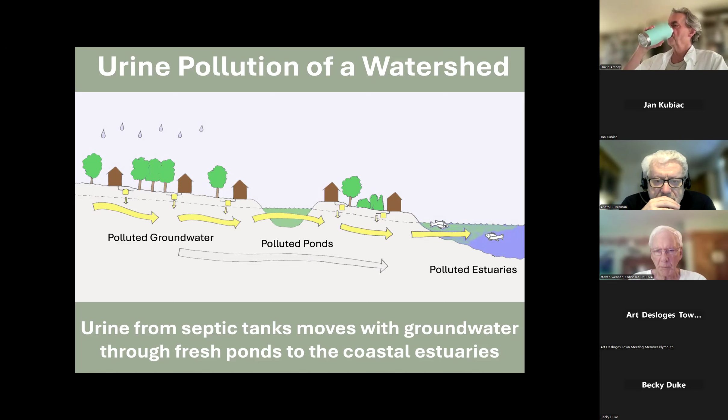So what happens here is if you're in a freshwater pond that gets polluted with nitrogen, you get cyanobacteria growing. And phosphorus too. Nitrogen and phosphorus both cause cyanobacteria to grow. Once the pollution gets to the coastal estuaries, it can kill fish by making algae grow too fast and decomposing and taking the oxygen out of the water, and the fish run out of oxygen.

And eventually these nutrients get into the actual ocean, and they cause pollution in the ocean. All the food from all the people on the Cape goes into the groundwater. The nutrients from all those people end up in the ocean. And it causes things like red tide, which is another version of cyanobacteria.

Now, the normal solution that people and towns turn to is they decide we're going to build sewers and collect the waste from the houses and treat it and try to get rid of the nitrogen out of the wastewater. And then they put all the water back in the ground again.

So a sewer only does one thing. It takes some of the nitrogen out of the wastewater that goes to the sewer. It turns it into gas, nitrogen gas, puts it into the air, and then all the rest of the water, which contains some of the nitrogen, all the phosphorus, all of the other minerals, all the pollutants, all of these contaminants that went into the water, go back into the ground again. So it basically only deals with nitrogen, and it wastes everything else. It does not recover any nutrients or recycle any nutrients.

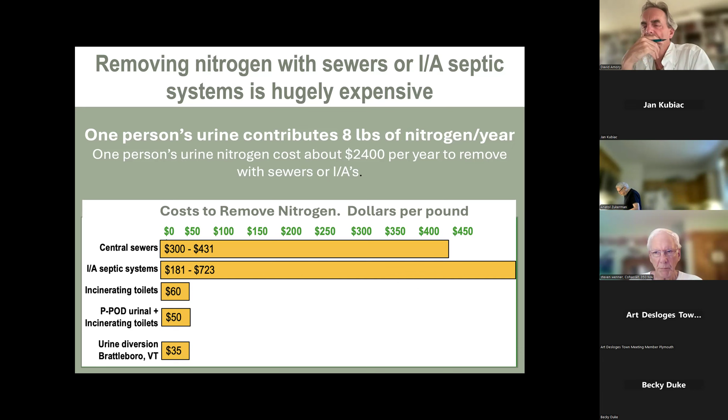There are other ways you can do this. We're going to talk about urine diversion, where you take the urine, which contains all the nitrogen, and you collect it and make it safe to use, and you send it off to a farmer who uses it as fertilizer. And doing it that way costs only a tenth as much as a centralized sewer or a special septic system. So it's a much cheaper solution to deal with the nitrogen. At the same time, what's not included in that is the savings on water if you do waterless urine-diverting toilets. And it doesn't have any of the climate issues that sewers have. We'll get into that later.

So right now we can go over the amount of water that we can save. If you have a waterless urinal, just the urine is about 4,000 gallons per person per year. For feces, it's about 2,000. Altogether, it's 6,000 gallons of water that we use as a way to transport our waste away from our house into a pipe that leads to another place. So water is only used as transport. There's no other function.

And the 12,000 gallons of water is now polluted with about 135 gallons of human waste per person per year. So the amount of water that we waste and pollute is huge compared to the amount of waste that we actually have to deal with.

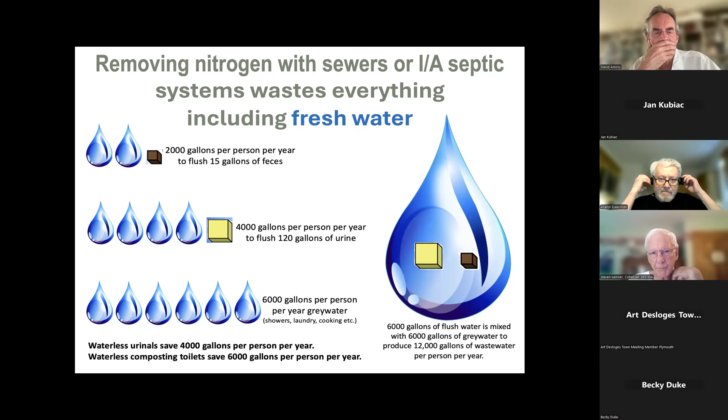So, in terms of greenhouse gas emissions, the way our society produces food and deals with our wastewater is extremely bad. It starts with making fertilizer for agriculture in a big factory, and it's made with natural gas. Very high amounts of fossil fuels go into making the fertilizer. And then machinery and fertilizer are used to produce food. And then energy is used to transport the food to the person who eats it, often thousands of miles.

The person eats the food and puts the waste nutrients from the food they ate into the ground, either in a septic tank or to the sewer. If it goes to a sewer, the sewer produces carbon dioxide, methane and nitrous oxide in the way it operates.

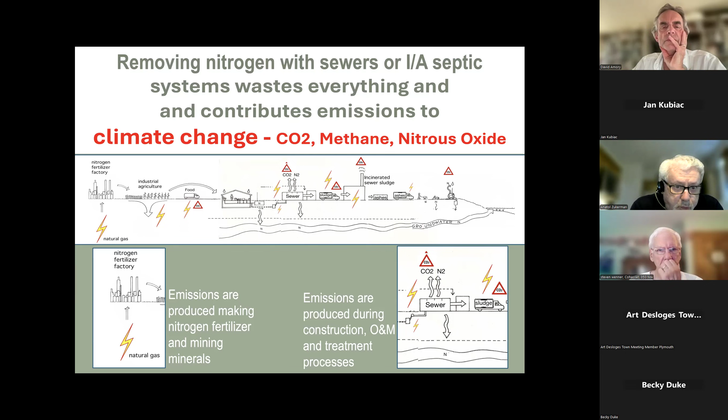And over the whole world, sewer systems produce about 7% of all the global greenhouse gases, a very high amount. And then the nutrients, some of them are trucked away and put in an incinerator and burned up, and they produce emissions there. And so all the way through the whole process, greenhouse gas emissions are being produced. And if you have urine diversion and recycling of the human waste nutrients, you can eliminate all of those emissions.

The weird part of this system is that we spend all the time and all those emissions on getting rid of nitrogen, which is essential for food production, that we absolutely need to then replace again with using more natural gas to make more fertilizer. So it's like a loss on every single part of the food production. So spending all that money on getting rid of nitrogen is absolutely ridiculous because you have to make it again.

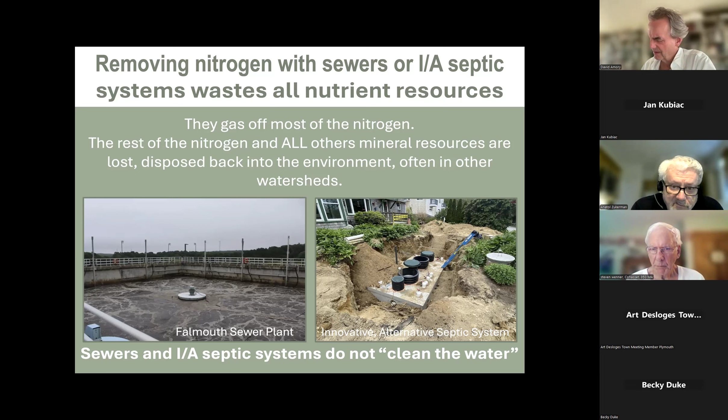To build a sewer for a single residence costs a town about $110,000 now per house. To put in an IA septic system, the homeowner has to pay for that, and the homeowner has to pay up to $50,000 to $80,000 to put this thing in. And so both of these are very bad solutions, extremely expensive. They produce emissions, all of them, and there are better ways.

So yeah, the IA systems, they always say they cost, on average right now, which we heard yesterday at the conference, $48,000. But what's not included is all the landscaping. So if you have trees or decks or whatever it is in the place where they have to put this, that is your extra cost. And to fix it later and put your landscape back again, that's another cost. Those costs are not included in any cost that you have seen mentioned anywhere.

And the maintenance, they never mention the maintenance, which can be very high. The last person we talked to, for her it was an extra $80 a month on electricity. There goes the climate. And then they had to have an engineer come. In some cases, it's monthly. Eventually, it's 4 times a year. Then it goes to 2 times a year. Then eventually, maybe once a year. And that might cost up to $400 per visit.

So what the towns typically do is they try to put sewers down at the estuary, but that's not where the problem starts. The problem starts on every house in the watershed, and by the time it gets to the estuaries, they put the sewer down there, and it doesn't fix the freshwater ponds, and it doesn't do any good for anybody upstream of the estuary.

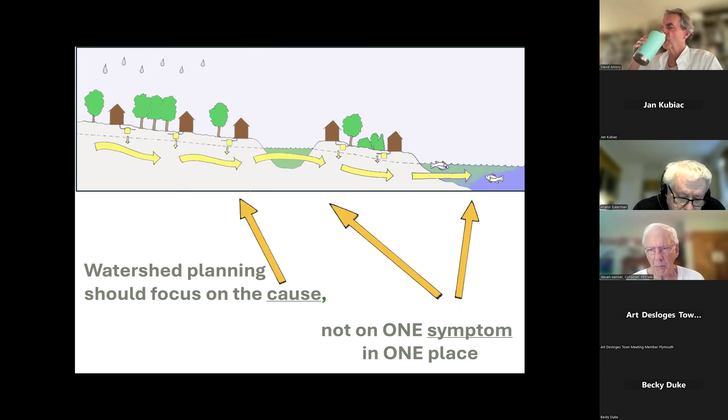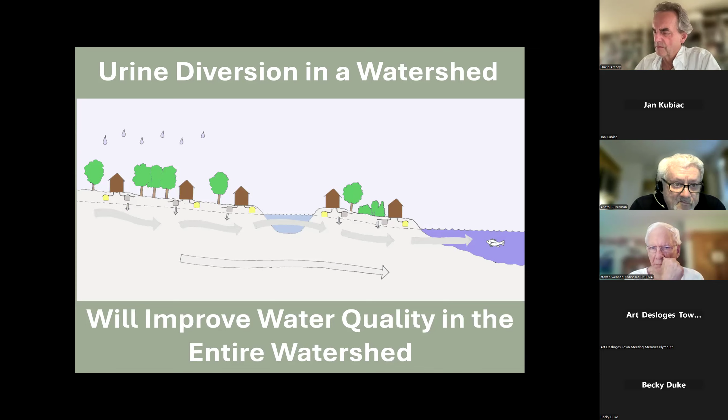So we propose that people divert the urine from their houses with special urine diverting fixtures and make it safe to use and transport it off to agriculture. If you do that, your groundwater becomes much cleaner. Instead of putting the urine down into the groundwater, you take it away above the ground, and the groundwater becomes cleaner and it goes through the freshwater ponds and does not pollute them with nitrogen and does not pollute the estuaries. Yeah, so it's a really good way to fix all the problems instead of doing only the dense areas close to the water.

And the only reason they do that is it's the only way that you can afford a sewer. And so they fix that, and then they have a quicker result because people live closer to the problem. So they hope they can see an improvement on the estuaries quicker, because everything else takes about a foot per day to move. So that's the reason why they do it. But it doesn't do anything for upstream, for any of the rivers, bogs, whatever is upstream. They're not going to get fixed at all. So we try to do the opposite and fix all the waters, and that way the estuaries get fixed.

So there are several different categories of special bathroom fixtures you can have that divert the urine. One is composting toilets. There are a number of different kinds that you can have. And several of them are permitted by the state, and the urine is diverted into the compost.

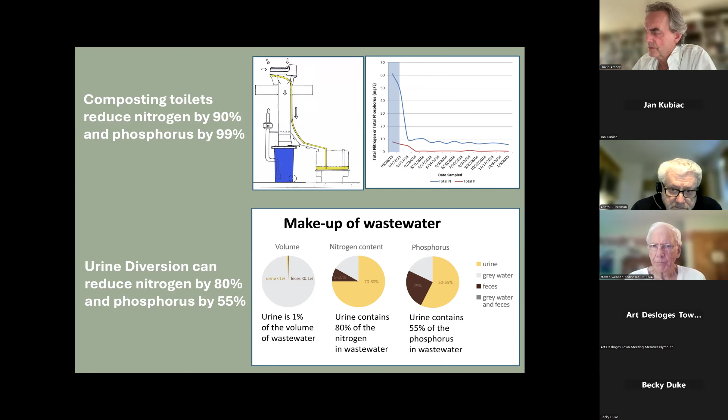And this was studied 10 years ago in Falmouth. And if you have composting toilets like this, it diverts 90% of the nitrogen, keeps it out of the ground, diverts 99% of the phosphorus, keeps it out of the ground. If you have urine diversion only, where you just have urine separated, you can reduce the nitrogen by about 80% and the phosphorus by 55%.

So there's a difference between diverting urine just to keep it out of the ground and recycling it. If you're simply interested in keeping it out of the ground, you can have a urine diverting fixture that collects the urine and then you export it. You can put it into compost, which keeps it out of the ground, or you can have an incinerating toilet, which burns it up, but it doesn't go into the ground. Those three ways, you can just simply keep the urine out of the ground.

It's diverting it. But you can also recycle the nutrients in the urine. That's called PeeCycling. That's when you collect the urine as a liquid, you store it, you treat it, you make it safe to use, and you give it back to agriculture. So where do the nutrients in the urine come from in the first place? It turns out that it comes from the food you eat.

460 million pounds of food are trucked onto the Cape every year. And all the nutrients in all that food goes into the groundwater through the toilet systems, and virtually all of it ends up in the wastewater and in the ocean. Over the entire world, virtually all the food nutrients that people eat end up in the ocean. Very little of it is recycled back to agriculture where it came from.

Also on the Cape, one of the causes of pollution in the water is fertilizer, normal industrial, commercial, chemical fertilizer people buy and put on their lawns or on their ornamentals. And the Cape imports 6 million pounds of fertilizer, and that becomes part of the pollution in the water bodies. So those two things together pollute the groundwater.

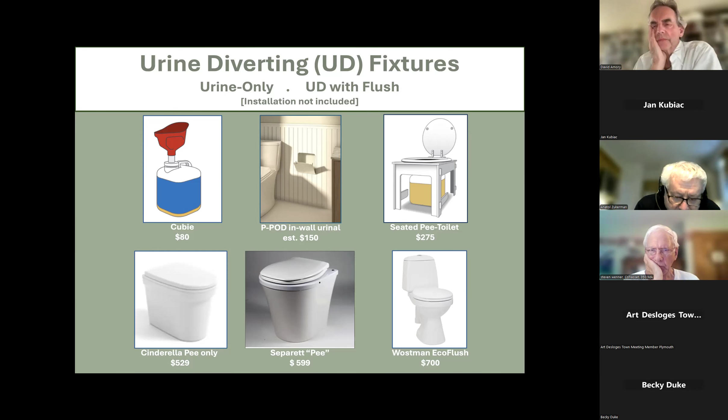There are urine diverting sit-down toilets that people can use, which are only used for urine, and it's stored in containers, and they're made commercially in Europe. And there are simple ones that are made by the Rich Earth Institute. There's also a urine diverting flush toilet where the urine is diverted, but otherwise it acts like a normal flush toilet and the solid material goes to your septic tank.

And then there are composting toilets, a great range of them. We won't go into it, but in most cases they make compost and the urine ends up in the compost or it's diverted separately from the compost.

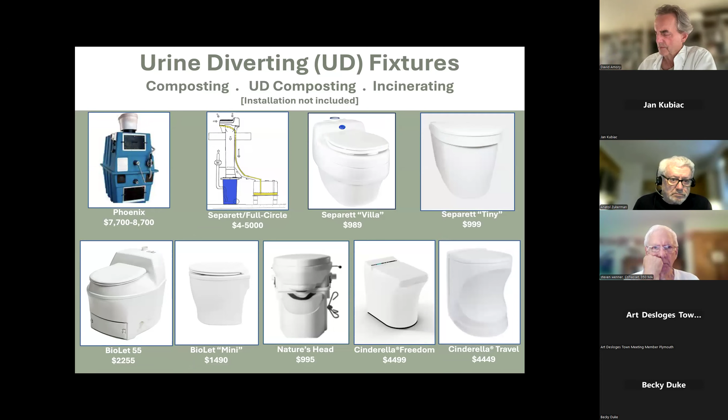So what do you do with this urine? If you divert the urine from your house, say from an in-wall urinal in the bathroom, you have it go out of the house in the pipe into a tank buried in the ground, or you have it go into a tank in the basement. In Vermont, they do both of these things.

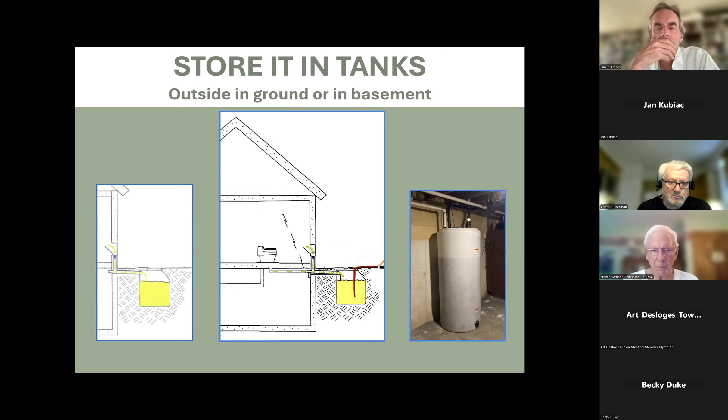So the picture in the middle shows a urine diverting flush toilet where the urine goes to a tank in one direction and it flushes the solids off in another direction to your septic tank. And if they have an in-wall urinal, it can also go to the same tank buried in the ground outside. You can store it other ways. You can store it in containers.

At the Rich Earth Institute, they collect it from people, they sterilize it, and they put it in large containers and they sell it to farmers. In Europe, there's a company that collects urine and they store it in these big cubicle containers and they process it and they make it into fertilizer for farmers.

On a home scale, it is safe to use urine directly in your own landscape from your own home if you carefully put it on the ground at a proper rate on the soil around the vegetables, around a tree, around a flower bed, around a shrub, and it's a high quality fertilizer.

On a commercial scale or on a town scale, the Rich Earth Institute has developed a machine that will pasteurize and make the urine safe to use. It passes it through this thing and heats it up to 176 degrees for 90 seconds. And that's enough heat to kill all the pathogens and all the viruses.

So they collect the urine in Vermont and they pasteurize it, and then it becomes safe to use as fertilizer, and they give that to a farmer. And the farmers in Vermont use it on hay fields and in cornfields as another fertilizer instead of commercial fertilizer.

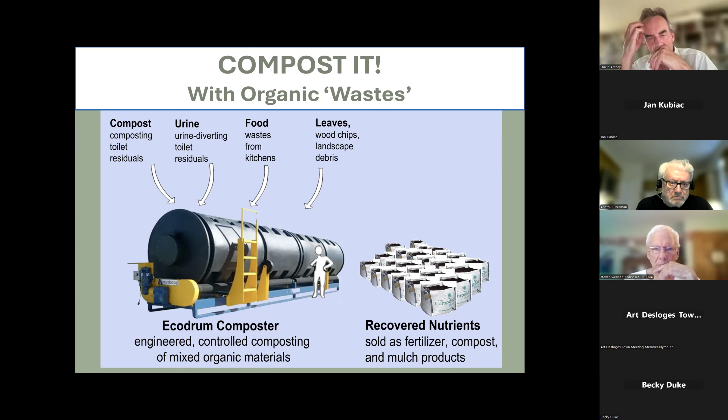The combination would be fantastic, but we have to go through all the regulations to get that off the ground. But that would be an ideal way to recycle our nutrients from urine and keep it out of the ground, and not need any sewers or IAs.

So these are the three ways that a community or a town could do urine diversion and recycle it. You could take it to a sewer and put it in the sewer, and they would treat it like normal wastewater, but you'd lose all the nitrogen. That's kind of a wasted way to do it. You could have it pasteurized with a pasteurizing machine and truck it off to farmers. And I propose that you take it off the Cape and you give it to farmers over the bridge where they have more agricultural land, and they distribute it on the land.

It takes 1 acre for 10 people to distribute a year's worth of urine. So a city of 30,000 like Falmouth needs 3,000 acres somewhere over the bridge to process a year's worth of urine. So it's within the range of feasibility to recycle the nutrients from the food people eat on the Cape to farms over the bridge. And you eliminate the worry about putting it back in the ground on the Cape. It's 10 people per acre.

And the eco drum or the composting drum option, we would like towns to do also, because there are many advantages to that. And it would also be economically a viable thing to do. So look at the cost to make a urine depot with a pasteurizer is about $24,000. That one pasteurizer can probably handle about 180 people. So again, the cost compared to sewers is very, very little. If one hookup of a person is now $110,000, having several of these in the community is really nothing compared to what we are proposing.

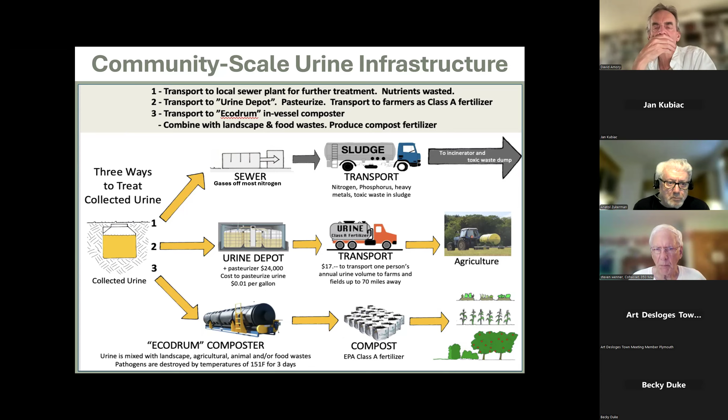So in general, urine diversion, the infrastructure, the technology required to do it is all proven, it's available, it's low tech, it's reliable, it's adaptable, it's flexible, it's environmentally more beneficial than other solutions, it's affordable, it's much cheaper, it's like a tenth the cost of any of the sewers or these special septic tanks. And it's less costly to the towns or to the taxpayer.

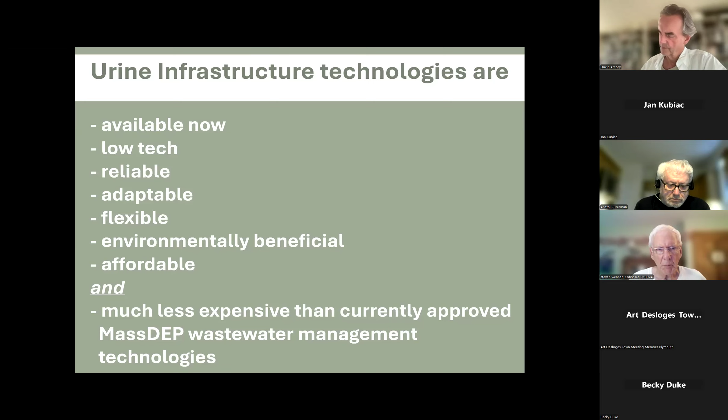So one thing that's not there is the greenhouse gases. And we bring this up all the time because it's contributing so much to greenhouse gases. And it's all a waste. So we waste all the nutrients, all the electricity, and then we pollute our climate. So when we ask them, what is the carbon footprint of a sewer? Well, they don't know. They've never had to measure. MassDEP does not require a sewer plant to put that into the plan.

So if we try to get to net zero at some point, we'll never get there because there are certain areas that are not included. So if you have all these sewers and all these sewer expansions, those extra greenhouse gases are not included in any of the calculations. So we'll never get to that net zero. That's why right now, as we all know, it goes up and up, no matter how hard we try. And the same thing is with IA systems. IA systems do the same thing. They contribute to CO2, methane, and nitrous oxide.

We don't have a slide on that, but we would like to introduce that as well because, again, we had a meeting for the Cape yesterday, a whole day conference, and climate change never ever comes up. The waste of nutrients never comes up. So these are externalities that have to be included if we make decisions of such major town. It's like the biggest cost that the town can do, but it's also the biggest contributor to our climate. And if that doesn't get addressed, then I think it's an unsustainable solution.

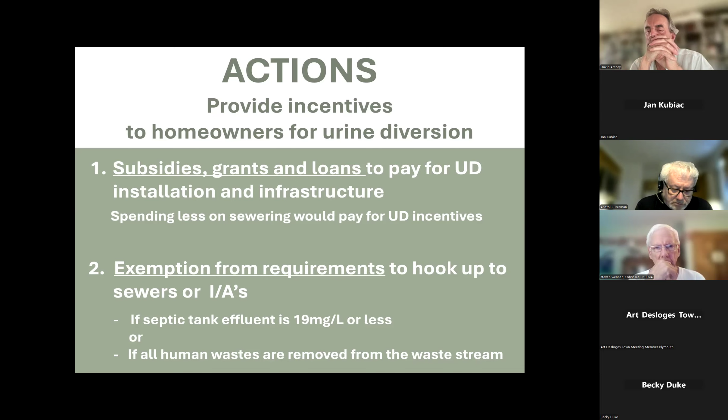So remember that it costs $110,000 per house. And that does not include the maintenance of a sewer, the sewer fees and all that. So for a town, if it costs $2,400 to take 8 pounds of nitrogen away, they can spend that on giving people incentives because then it becomes much more efficient. So that's what we're proposing. And we said, if we have a pilot project in Falmouth, you should not only help people pay for the installation, you should even give them money for every single pound of nitrogen that they have removed, that the sewer doesn't have to remove or some other IA system doesn't have to remove.

Let's do the last one. You do that. This is.

Yeah, so we went through this already, that it conserves water, which never comes up as an issue, which becomes more and more critical, even in Falmouth and even on the Cape, because it costs more and more to clean our water. As an example, like in my home country of Holland, it's all water. We're not lacking water there, but we're lacking clean water. And to clean the water, it becomes more and more expensive because there's no clean water to start with, because all the water is polluted. We're getting the same thing in Falmouth or on the Cape. The water gets more and more polluted, costs more to process it, to make it into clean water.

So in Holland, they asked people to reduce their water use only for the cost of making it into clean water. But then they flush most of the water in the toilet. And that's drinking water that they made drinkable to flush in a toilet and waste. And that's the modern way to do it. And the whole world tries to copy that, and it's going to be an incredible disaster.